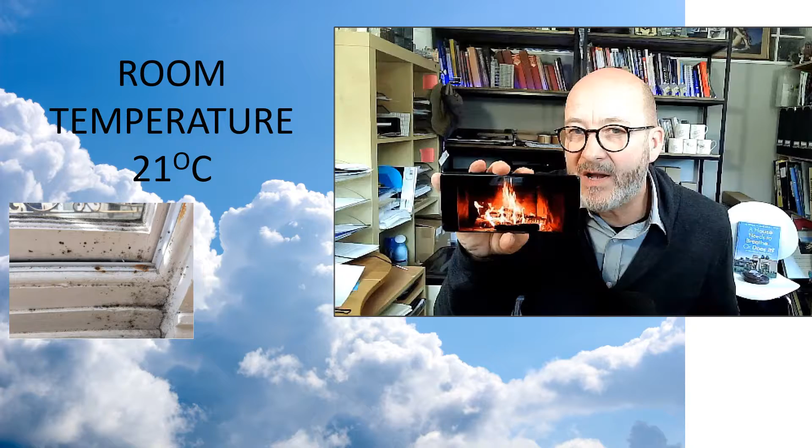Either you need to put more heat into the room to heat the window up, or you need to put something in and around the window to make sure it does not get cold. This is why we start adding insulation to walls, to try to keep them warmer, so that the wall has energy too. And that's what it's all about.

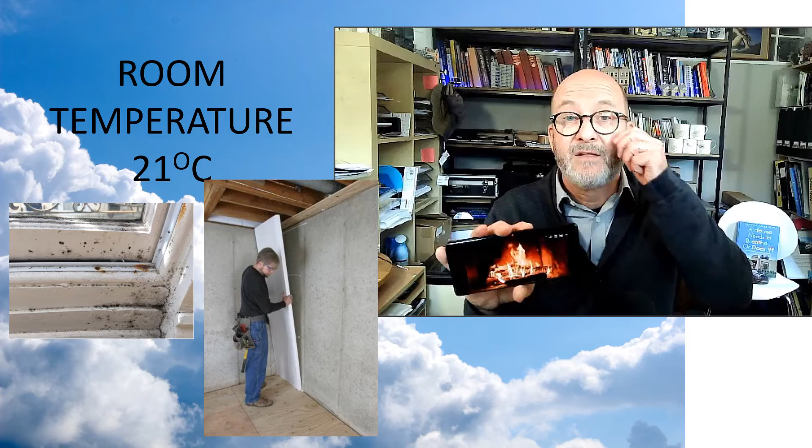The energy we put into the air also heats up surfaces, like the windows, walls and ceilings. Now if those windows, walls and ceilings don't hold on to that heat and let it go, then they will stay cold. And if they stay cold, that's when you get the mold.

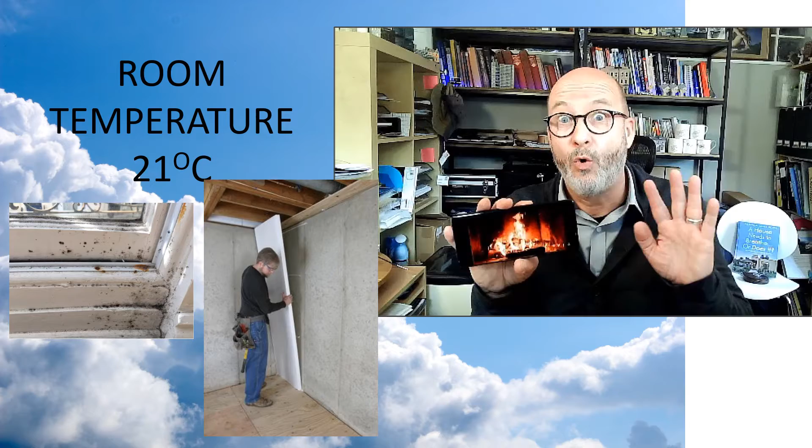So wherever you see the mold, whether it's a spot on the ceiling, a bit around the window frame, or maybe all over the walls, it's because those surfaces are way too cold. You need to either heat them up constantly, or in some way keep them warm once you've heated them up.

That's not a simple trick, because you need to put more energy into the air to achieve that. So the only reason we insulate things is so you don't have to put quite as much in, so they don't cool down. But that doesn't mean they would never cool down or never be out of balance with the amount of moisture you put in the air.

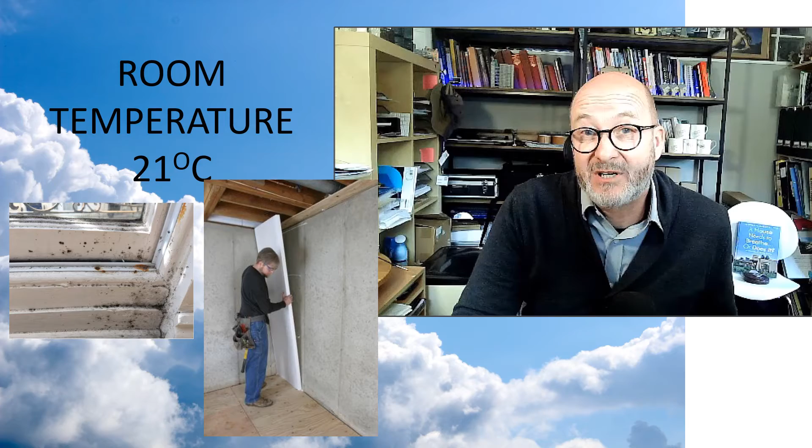So you can see that even if you did put insulation in, if the balance is not right, then the mold will come back.

When things get out of control with mold, you do have to act quickly. It can be extremely dangerous, so you need to work on it as soon as possible. If you have mold on nearly all the walls in all the rooms and it does not go away, and you've had this for more than two to three months, this would be considered an emergency, and you really need to get onto your landlord to get it done immediately.

One of the first things you need to do is get a specialist around to clean all the mold down with special mold killers. Don't try to do that yourself, because you may upset some of the spores and cause problems with health that could already be prevailing. So just be very, very careful.

If it's just small amounts, that's fine, but we're talking about large amounts that have been there a long time. So that's point one: get in and get it cleaned down with a proper mold killer. That just deals with it immediately, it doesn't mean you've cured it. So if you're a landlord, do not think you've cured mold simply because you've cleaned it off, or because you painted something with anti-fungicidal paint. This is not the cure, and it will not stop it coming back.

Now let's take a look at some top tips you can do. Make sure you've got your programmer running. The really big tip here is if you don't have much in the way of heat, and you don't want to spend a lot of money heating the house all the time, then use it wisely. Don't waste the heat, and a programmer helps you do just that.